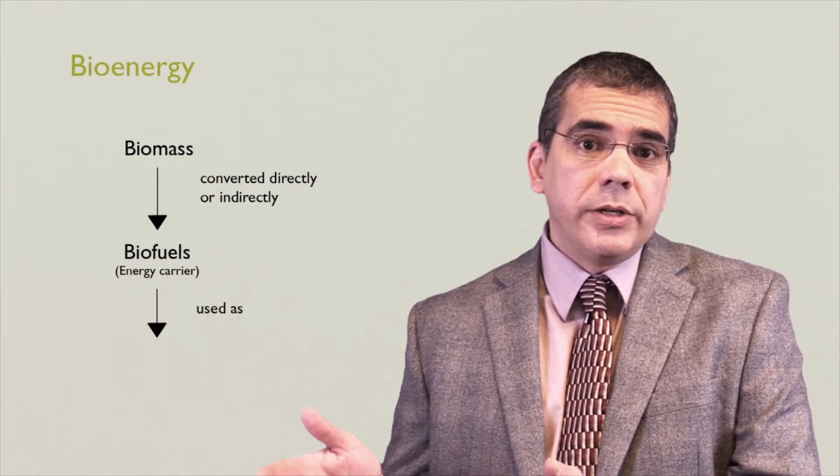So what is bioenergy? Bioenergy is widely known as the energy derived from biofuels, and biofuels are derived from biomass. You can summarize that bioenergy comes from biomass. Biomass is converted, either directly or indirectly, into an energy carrier, which will be the biofuel to use as the energy source. There are many types and sources of bioenergy. The types can be either liquid or solid, for example, and the sources can be agriculture sources or municipal solid waste sources or maybe forestry sources. Let's focus on agriculture sources given the focus of this session.

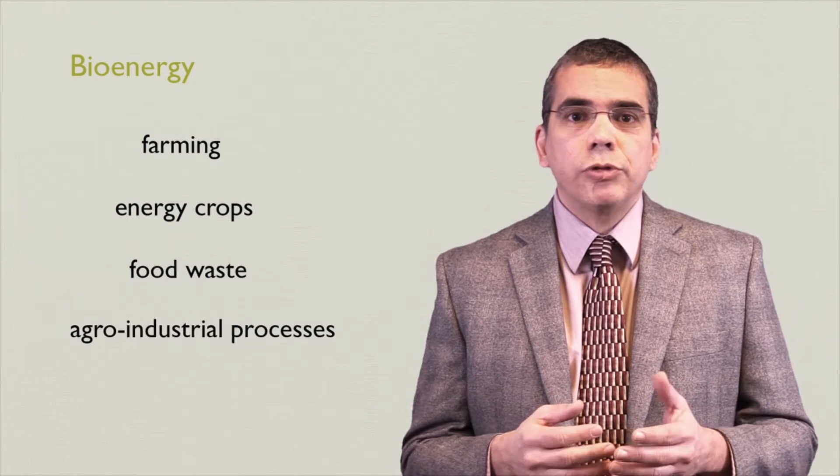So what are the main agriculture sources? They can be from farming, for example, livestock operations. They can be from energy crops. They can be from food waste and also from agro-industrial processes like palm oil mills or sugar refineries. They generate large amounts of high organic content waste that generates methane naturally because of the way they are disposed.

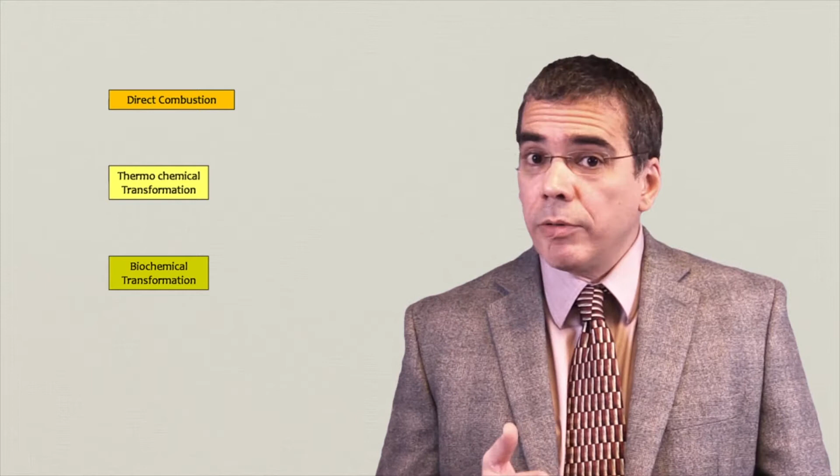So how do we transform this feedstock, these agriculture sources, into biofuels that we can use as an energy source? Well, there are several ways. It could be a direct way, like direct combustion, or it could be indirect ways like thermochemical transformations, like gasification or pyrolysis, or it could be biochemical transformations, like fermentation or anaerobic digestion. We will talk later about anaerobic digestion in more detail. In this next slide, you can see a summary of what I just said. You have the biomass on the left side, you have the transformational processes in the middle, and this could be gasification or fermentation or anaerobic digestion, and finally the type of biofuel that you generate through this transformational process.

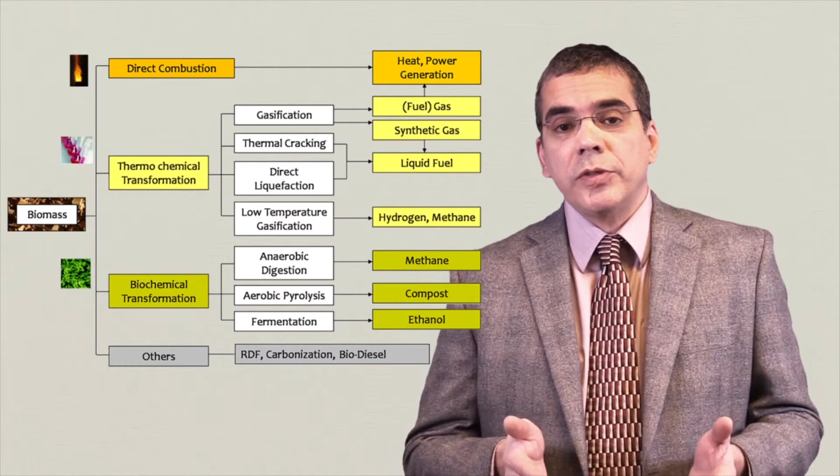So now that we've seen the different technologies for bioenergy, let's focus more on anaerobic digestion. Why anaerobic digestion? Because it is commercially proven. It has been used in the agriculture sector for many years around the world. Many of these technologies are in place, are working right now, and their main product, their main result, which is biogas, is widely used in the industry.

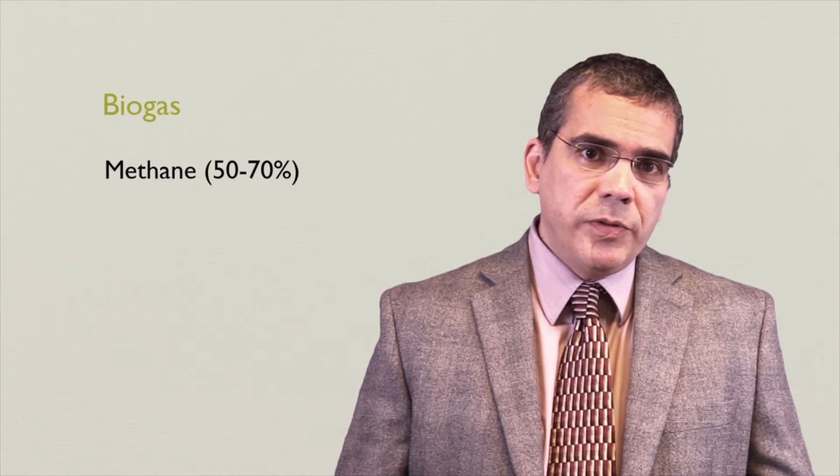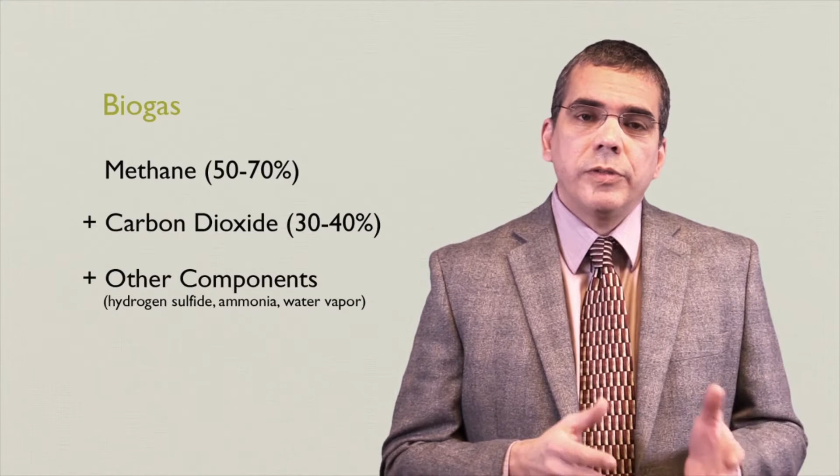So what is biogas? Biogas is a mixture of methane, between 50–70%, carbon dioxide, around 30–40%, and some trace amounts of other components, like water vapor, for example. The feedstock will define the actual amounts of methane, carbon dioxide, and trace components. So how is methane formed? Well, methane can be formed both naturally and from man-made sources.

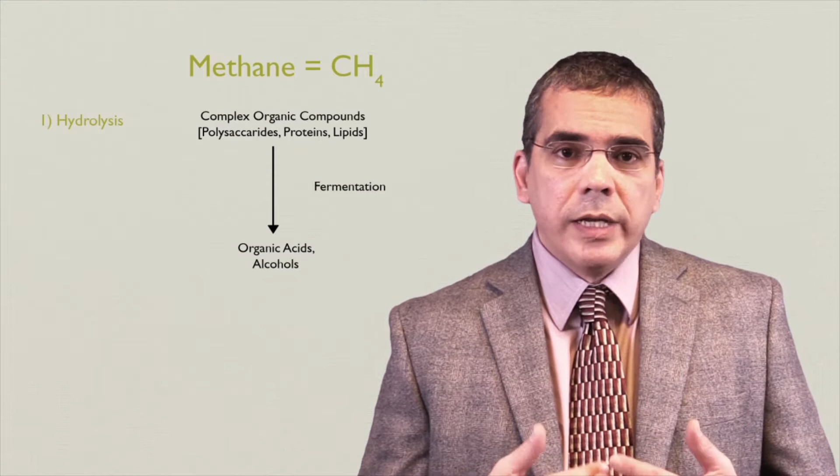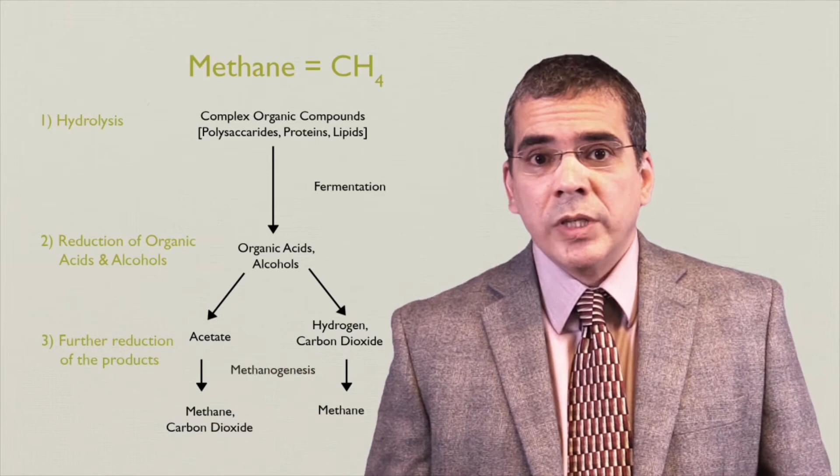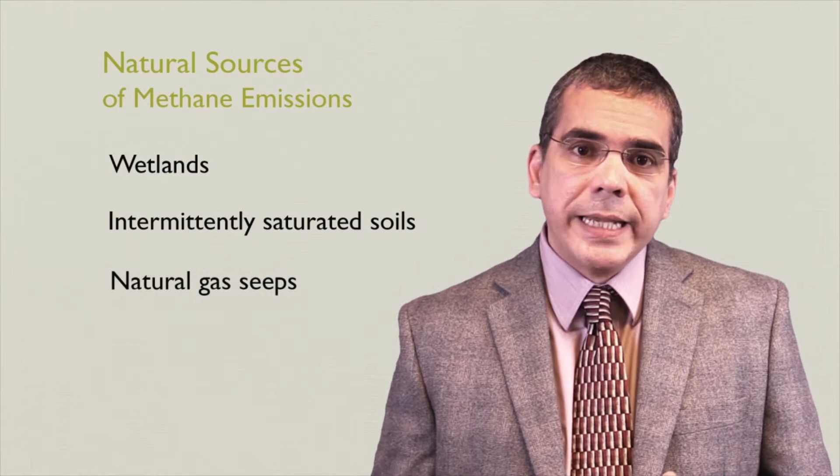Methane is formed in a three-step process. First, hydrolysis. Complex organic compounds are hydrolyzed and create alcohol and organic acids. These are further reduced into acetate, hydrogen, and carbon dioxide, which then are further reduced by methanogenic bacteria into methane and carbon dioxide. This process, like I mentioned, can be either naturally formed or it can be a product of man-made processes. Naturally formed, you can find it, for example, in wetlands, where the organic matter decays in the water and generates methane naturally. But the most important ones are actually the anthropogenic or man-made sources.

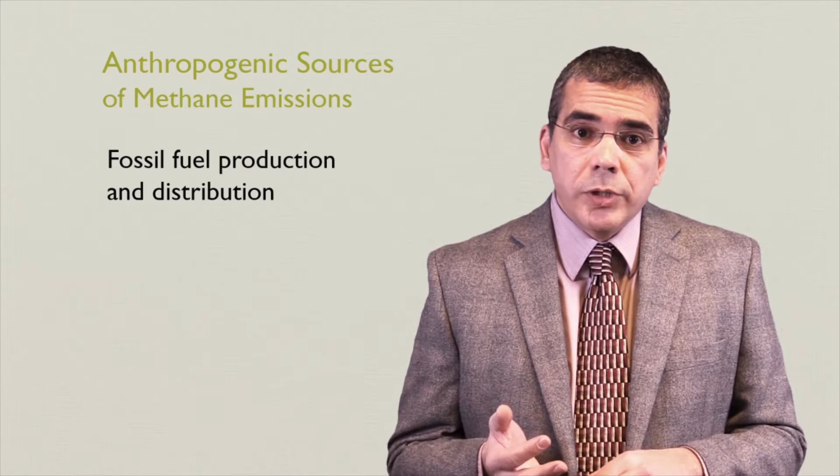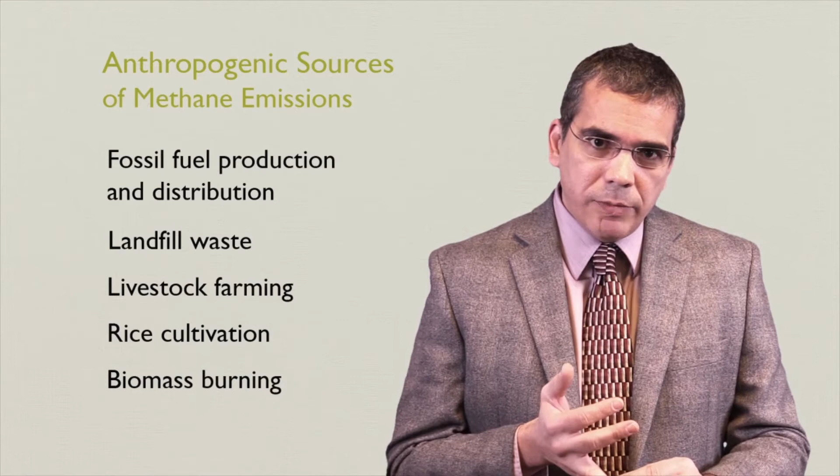For example, fossil fuel production and distribution. They generate large amounts of methane. Landfill wastes, livestock farming, rice cultivation, biomass burning. All these sources generate methane, and these are all man-made sources. The important part is that in the agriculture sector, particularly the farming, particularly the wastes from agro-industrial processes, these can be contained, the biogas can be captured, and it can be used as an energy carrier and replace fossil fuels. This has both climate change and economic benefits.

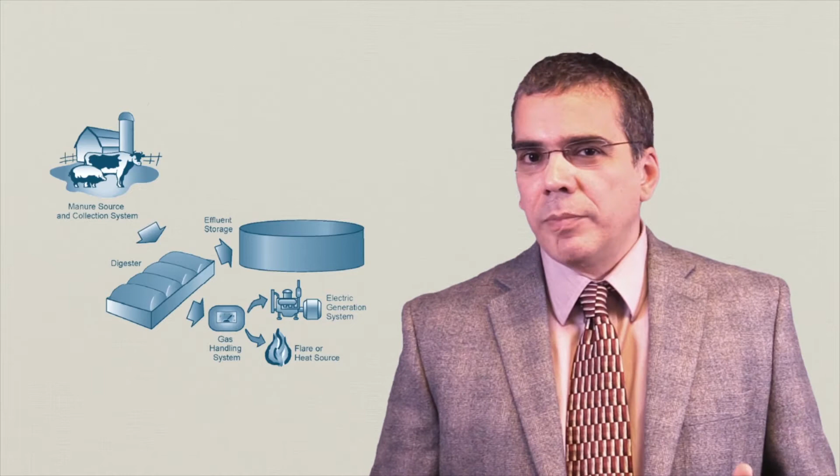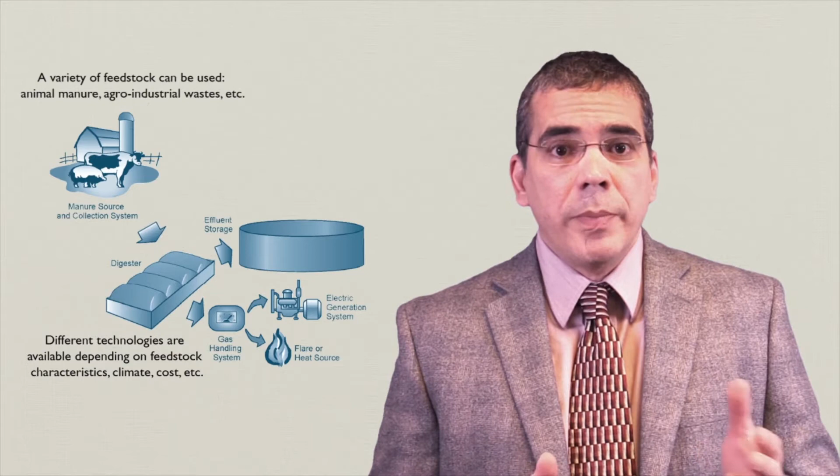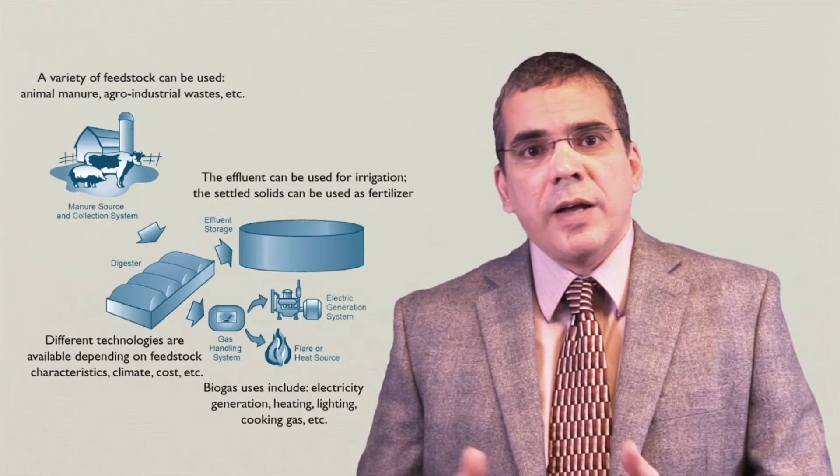So now that we know about biogas a bit more, let's talk about biogas technologies. In this first slide, you can see a schematic of a biogas system. The first component is the feedstock. It can be animal manure, it can be agro-industrial processed wastewaters. The second component is the anaerobic digestion system where the biogas is generated. And the final components are the biogas, which is the main product, and the effluent, which is a byproduct. The effluent can be used for either irrigation or as fertilizer. The biogas is obviously used after cleaning up as an energy source, or it could be used for heating or lighting.

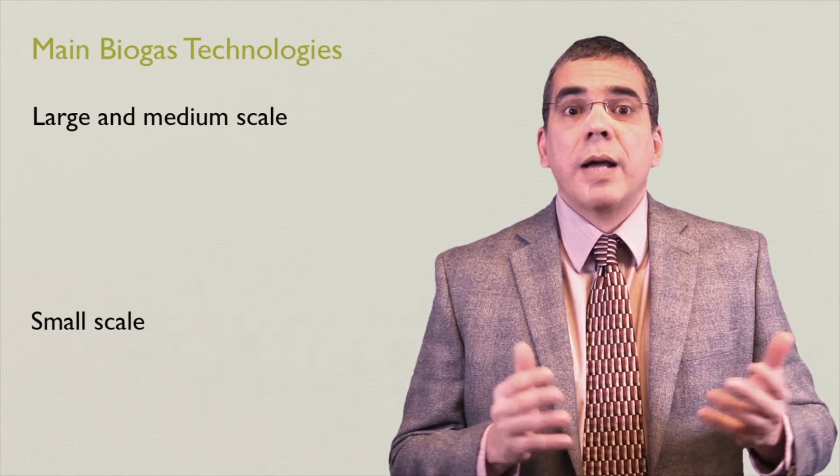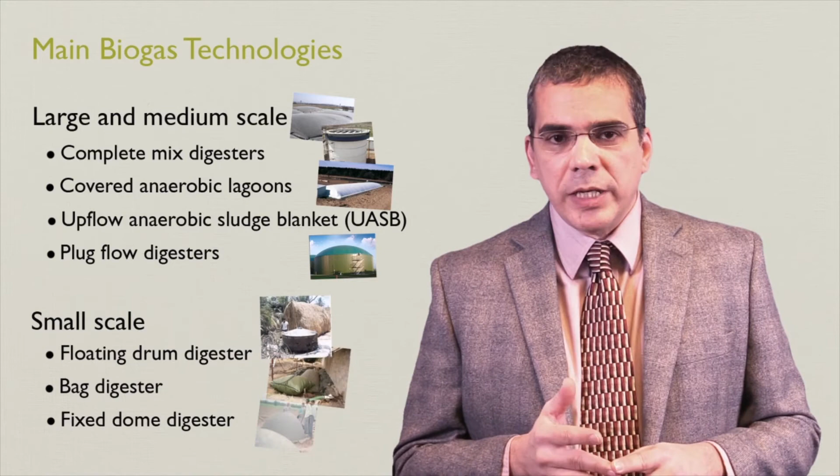So what are the main biogas technologies? The main biogas technologies can be roughly divided between large and small scale. Large scale are usually grid connected or captive user projects. These are complete mixed systems, covered anaerobic lagoons, upflow anaerobic sludge blankets, that type of technologies. The small scale technologies are floating drum, bag digesters, or maybe fixed dome digesters. These are more appropriate for household level users.

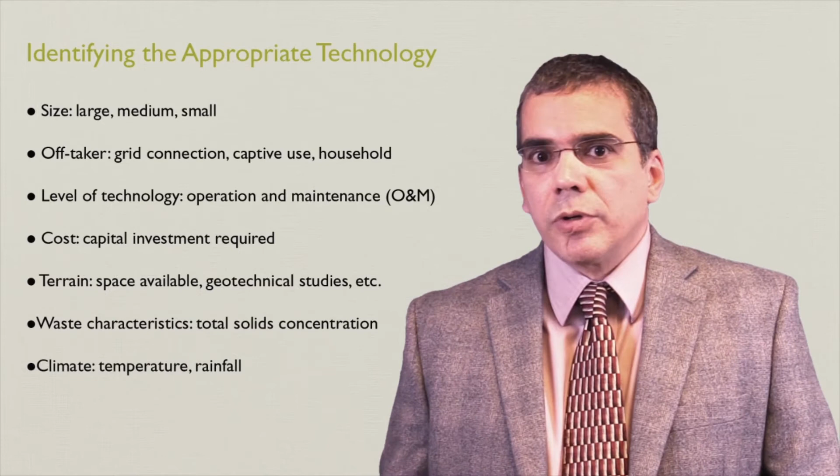So how do they use these technologies? And what is the appropriate technology? And how do you identify this technology? Well, as we mentioned, large scale and small scale immediately divide the type of project that you have. If you're going to be grid connected, or if you're going to be selling large amounts of biogas and energy to an industry, a captive user, then you probably need a large scale technology. If you're just going to be using biogas for cooking at home, then most likely you need a small scale type of technology. So how do you compare these technologies? This next slide provides the advantages and disadvantages of each one, and this can help you select the appropriate technology based on the type of feedstock that you have.

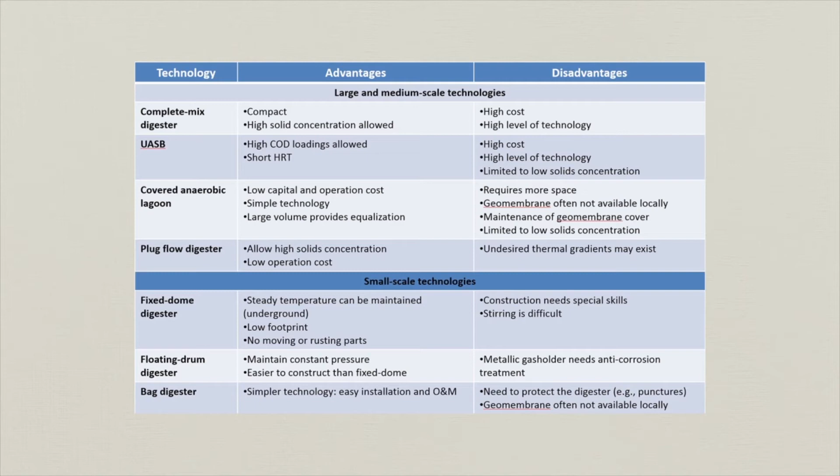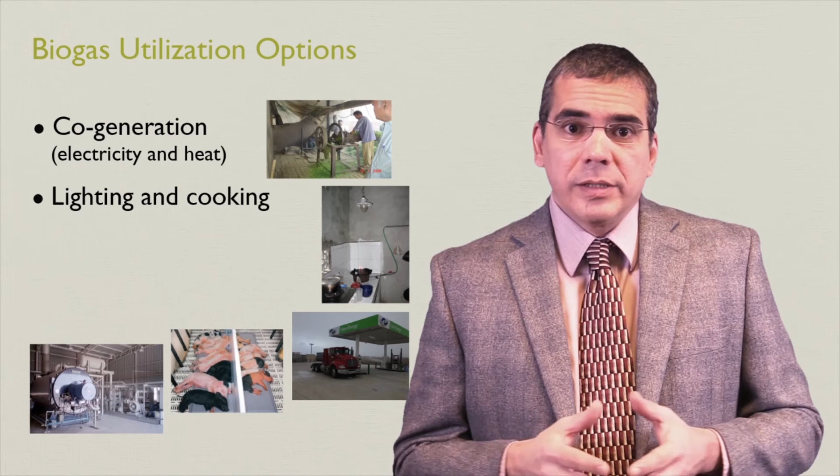So now that we have the right technology, how do we use the biogas resulting from the anaerobic digestion process? Many ways to use the biogas. Cogeneration is probably the most significant one because it uses not only the biogas to generate electricity, but it also captures the heat when combusting the gas and recuperates the heat, increasing the efficiency of the overall system. There are also many other uses for biogas, for example, cooking and lighting, and vehicle fuel, although this one requires large amounts of biogas and also a lot of compression and costly capital costs.

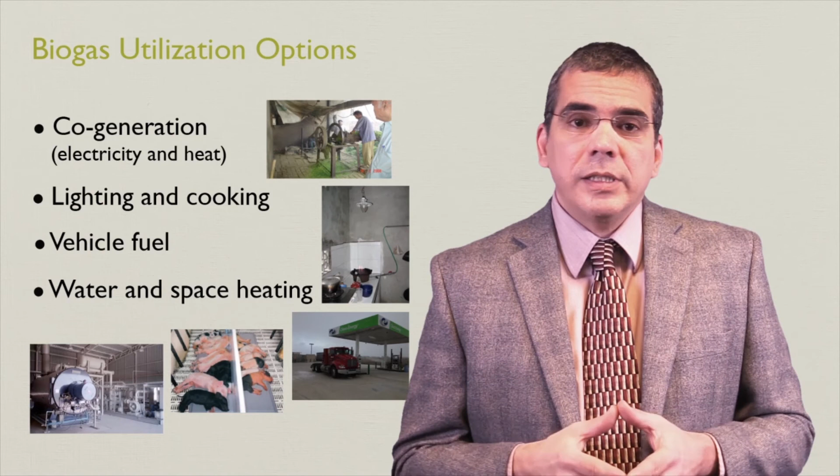As a summary, what are the key lessons learned today? First, that bioenergy technologies and resources are diverse, that biogas technologies are commercially proven and that they work, and finally, that each project and each circumstance is different, and each technology will have to be tailored to the specific circumstance. Otherwise, it might not succeed.